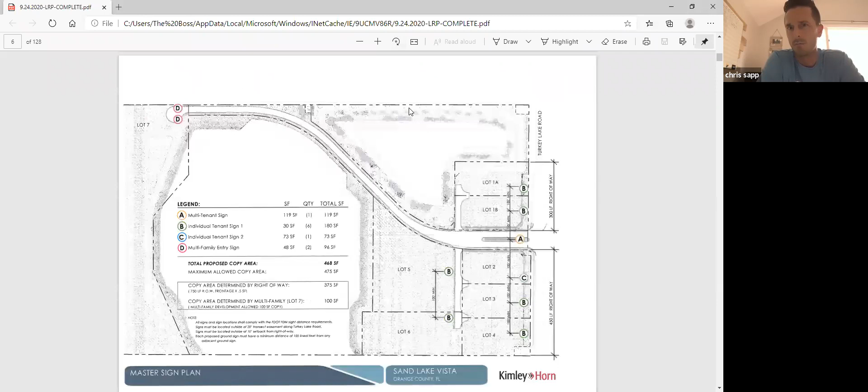Kimley-Horn also has a department that deals with signage, and they had presented a resume of sorts for LRP to take a look at. And I apologize, it was not part of the agenda. I noticed it today, we shot it out, so I don't know if everybody got a chance to take a look at it. But they have done stuff as local as Kissimmee, so they are familiar with municipalities, HOAs, businesses, etc.

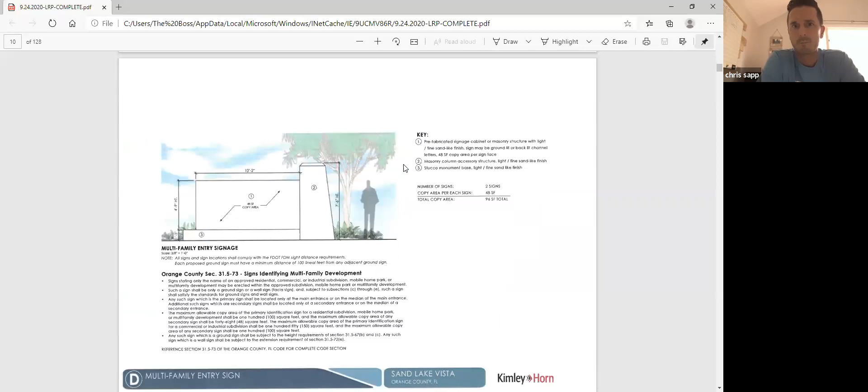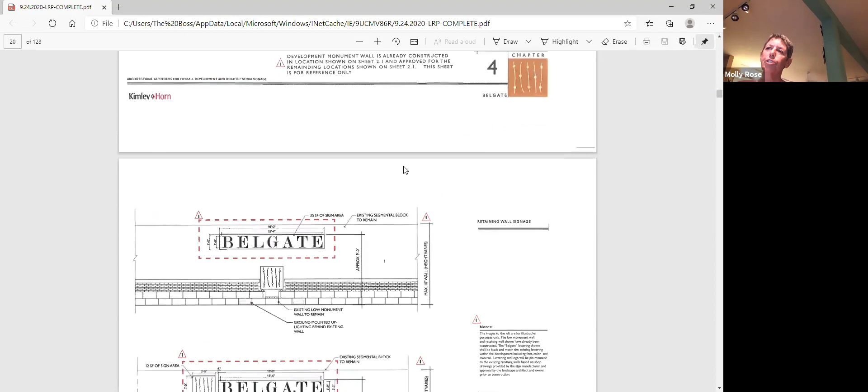Could I ask a question? I think Kimley-Horn's plenty qualified to do this and everything. I don't have a problem with them doing the design and putting out the bid packages and all that, but I don't like the idea of making it a turnkey with them, because they really don't have production capability. I mean, they can oversee it, but why pay an upcharge to have a middleman? You know what I'm saying?

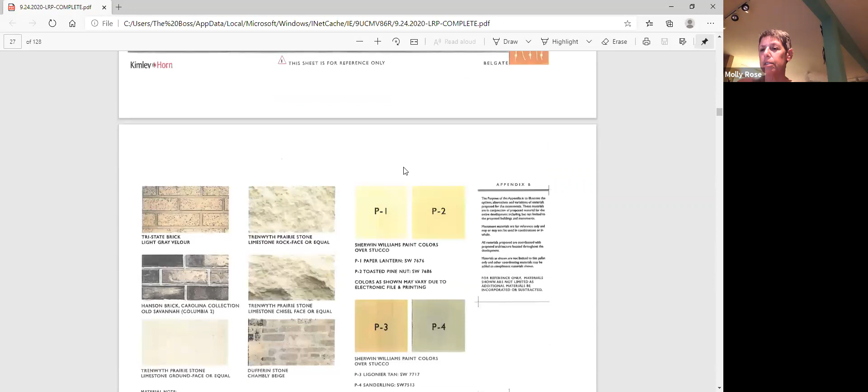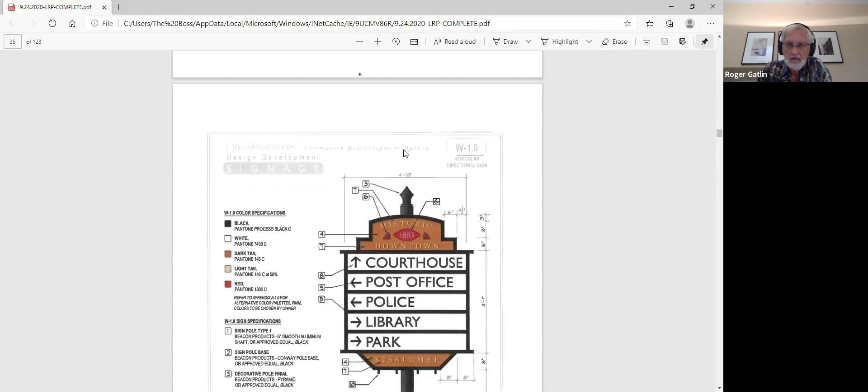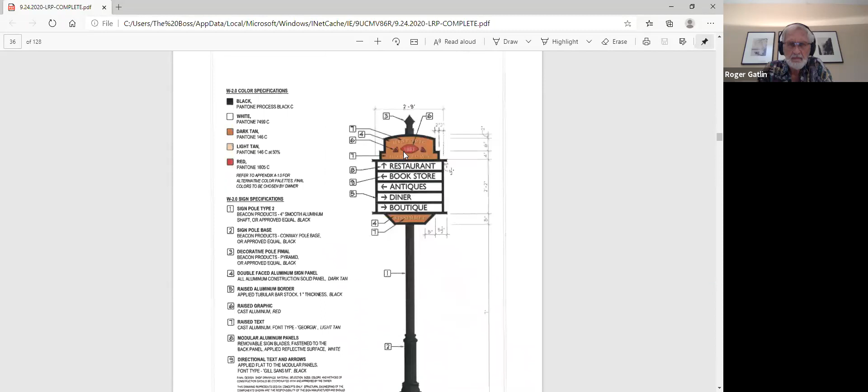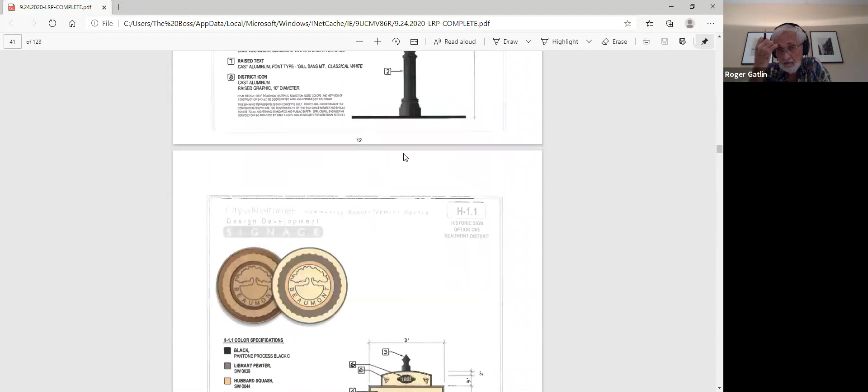What was the thought of the town council in that process? Wasn't theirs would be just a design, not a design and build or anything? Well, yeah, go ahead, Chris. Yeah, town council's not discussed this because we want to put it in front of LRP first, but basically what we're looking for from them would be individual IPOs for a specific project to come up with design. And, of course, we could put it out for a request for quotes for actual production of it.

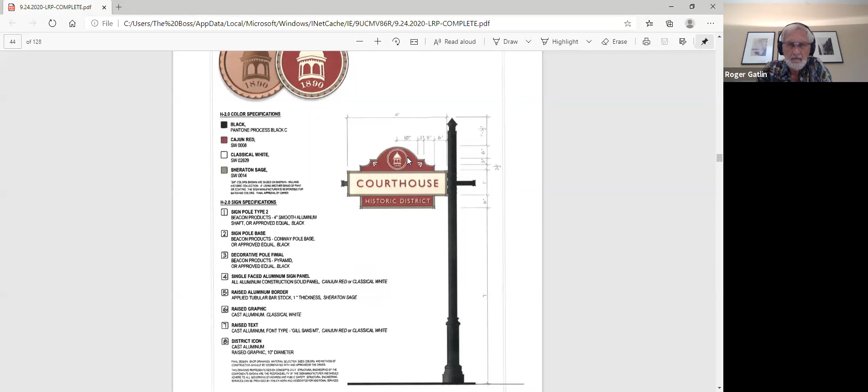Okay, because I don't mind recommending them to do the design portion of it, but I don't see giving them the turnkey of it.

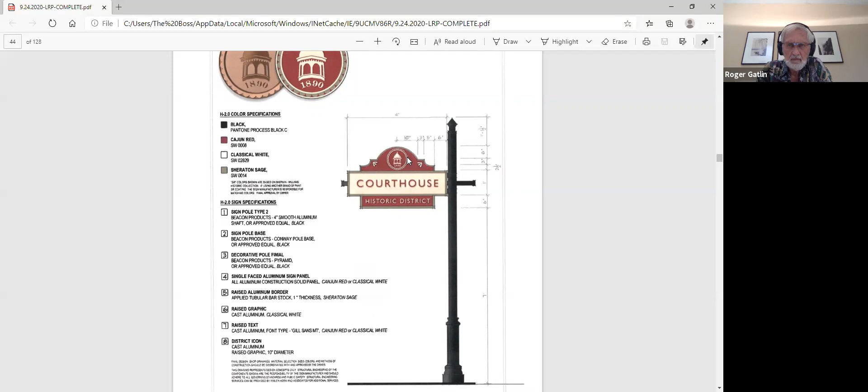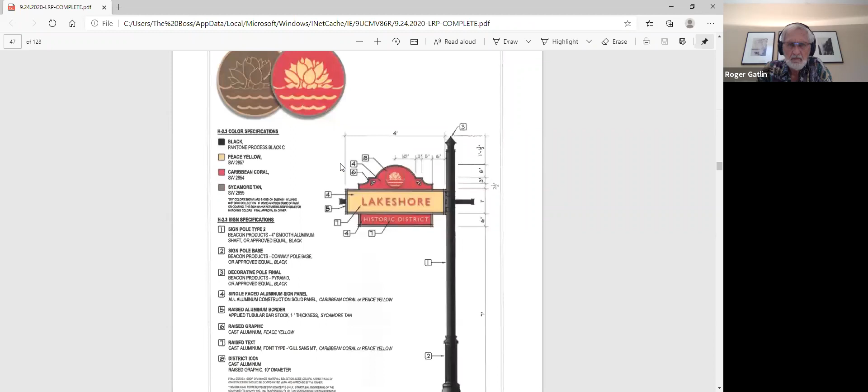No, Molly, I don't necessarily think confusion is a good word. Maybe it's just a slight change of direction. When we were originally talking months ago, we were looking at kind of a DBO type thing, design, build, operate, and I think that narrowed the field to what we had. Then as we started going through this, we felt like if you're looking for folks that could actually do the graphic fabrication work, they may not have as much of the design intent that we would want. So I think we backed off a little, realized we already had an in-house under contract

engineer, and that's one of the reasons why we picked Kimley-Horn back in the day, was because they had this wide berth of urban planners and graphic designers. So we thought maybe it would be best if we just allowed them to work the design. Chris, forgive me if I'm stepping on toes here, but the whole idea was maybe, since they understand our town, they're working with us on all our roadways and stormwater, they're actually doing the board trail, it became apparent that holistically for a design approach, they might be the best, and then we'll just go out and bid it for fabrication.

Yeah, I think it'd be very similar to the engineering projects, where they get it all the way through engineering, and then maybe part of their scope would help with finding that actual fabricator in the end, because we may need some assistance with that.

Yeah, and also they could give a cost estimate. With these specific sign deals, we may need to give them what we think is our budget for a sign, so they don't go too elaborate, since some of the ones they've done are pretty elaborate. I think we'd give them a design, which usually includes estimating and cost estimation.

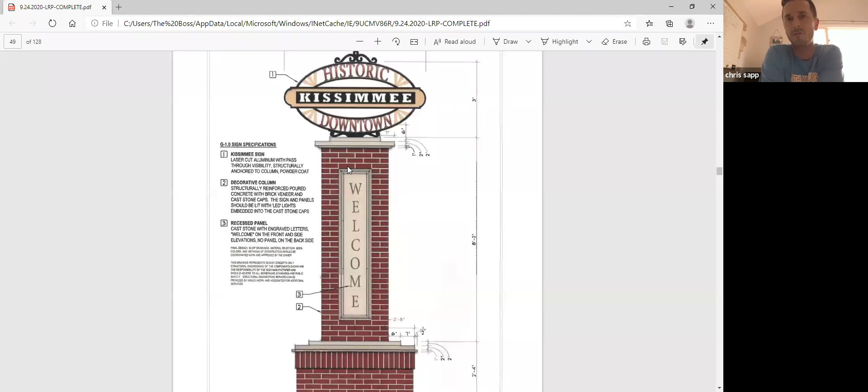Correct. And then from that point, as we do with roads, let's say a road project, then we would go out for bids for specific contractors to do the work.

Right, okay, yeah, I'm okay with all that, because we tried going the other way and did not pick the right signage company, so they did a bad design, and fabricated a bad sign. I think that was my fear, Molly, that if you don't have the right design team, you end up with what we ended up with.

Is that big red? Having worked with graphic installation and design firms for years, I think what you'll find is that most folks that fabricate signs are very rudimentary in their design and look. So it's probably a much better approach for us to do this so we don't end up with big red.

Okay. I think there's a manufacturing firm that does a lot of the village's stuff, typical signage like this. So I can reach out to them and see, once we have a design from KHA, we can reach out to a couple vendors that I know over there. There's a ton of vendors here that we use at Universal Studios.

Yeah, so we've got the talent. Great graphic design and signage companies that fabricate for Disney, Universal. So I think we'll find the right guys based on the type of sign we're doing and the design intent that we have.

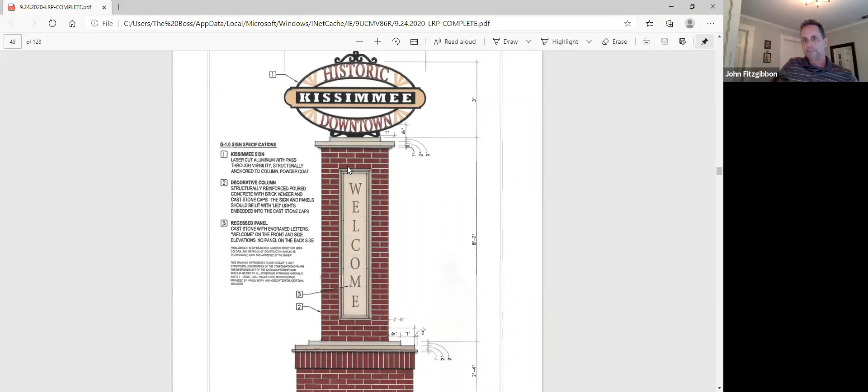Okay. I think Scott's not on because of the red sign.

I think Scott chose to miss this meeting and throw me into it because he knew the signage was going to be discussed. Yeah, he learned a really big lesson there.

I guess the motion for LRP would be to recommend hiring Kimley-Horn as a designer for signage, making clear that's the limit of it—a typical engineering or design contract, not a construction thing.

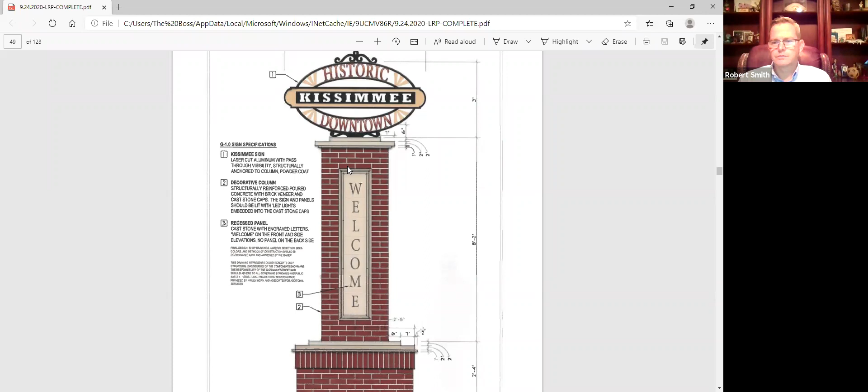My only question before we do a motion: do we want to specify any particular signs they'd start with, or leave it open? Council can designate which signs we want them to look at first, like entrance signs. I recommend leaving it open, since they'll have various signs to work on—entrance, wayfinding, and so on—each done as an IPO for whatever signage we'd like to see.

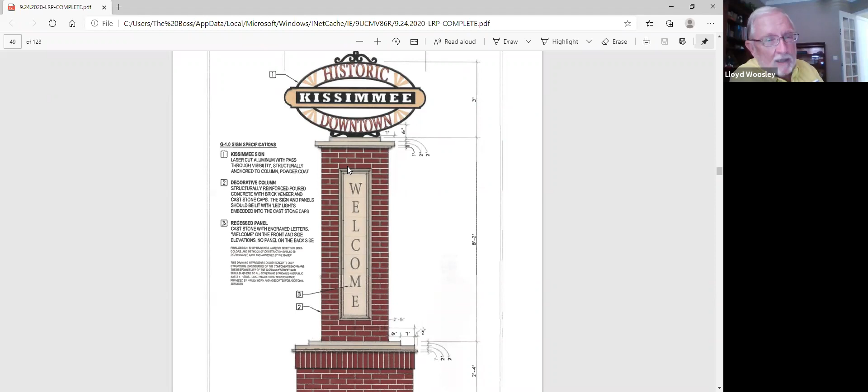But wouldn't it be safe to say we don't want a Kissimmee entrance arch? Yes, they can rule that out. I like the one at the Villages that goes over I-75. If you've seen that one, it's really nice. I think we can limit it to one side of the right of way. We're actually designing Klieg lights for the new facilities, so it'd be really cool—those lights, the three that kind of spin.

So I will make a motion that we recommend hiring Kimley-Horn to do design and supervision. I'll second that, but I'll amend it a little, since they're already hired. The motion should be that we agree to use our existing engineering services firm, and that any signage will be done through IPO, specifically for the tasks at hand.

I would just have staff draw up an amendment to the current master service agreement. I think that's already part of it, to be honest—I thought all we'd have to do is issue an IPO to them, since we had urban planning, it was general engineering services. I think we're okay with how the language is structured for their master services agreement, and the individual IPOs would define the scope specifically to that group of graphic designers for the firm.

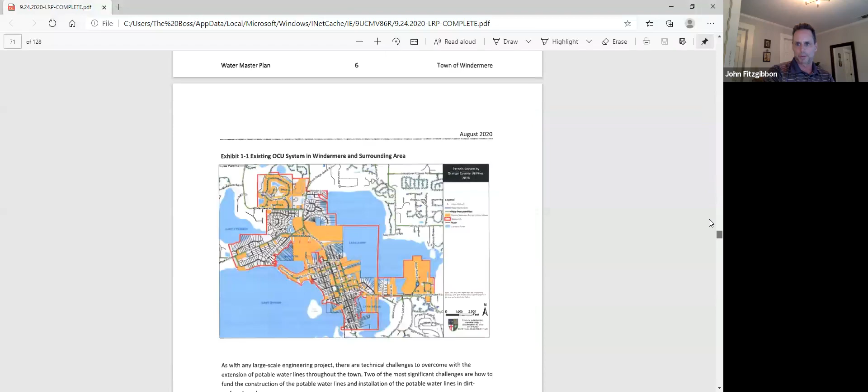Now, I was looking at the cost savings plan, the existing streets that have water - some of them didn't have new hydrants going in. I was looking at Pine Street because I live on Pine.

So you're saying that will be retrofitted with 500-foot spacing? A lot of the lines were not sized.

You need a minimum of a 6-inch line in order to have a fire hydrant. That's the minimum. So that's what we're looking at doing, and then making sure that the systems are looped so you don't have dead ends. Because once you have a dead end, then you have to flush those lines somehow.

One of the areas we're going to have to do a dead end is West Second Avenue, but we're trying to figure out ways that instead of wasting the water, can we hook it up to somebody's irrigation line.

But again, I didn't see in the plan any additional hydrants on Pine, as an example. Right, so if there's a need on Pine, then we can install them as long as there is a 6-inch line. The flow is going to be the same.

No, I was just reacting to your comment about 500-foot spacing, and I think it's much longer than that currently, so I was just curious. Yeah, some standards ask for about 1,500, but I think we wanted to do it about 500 feet.

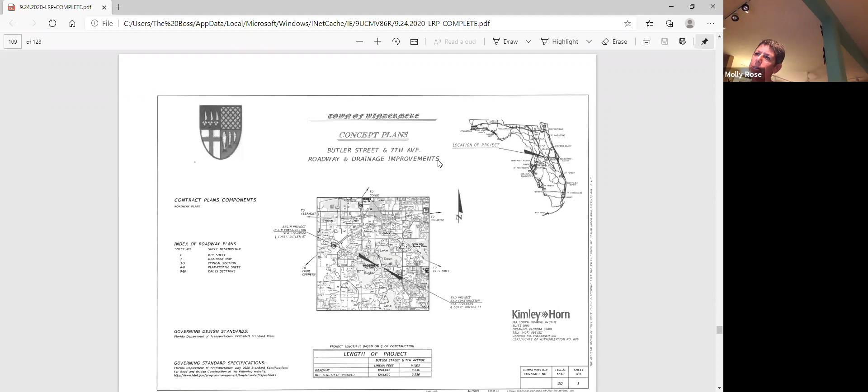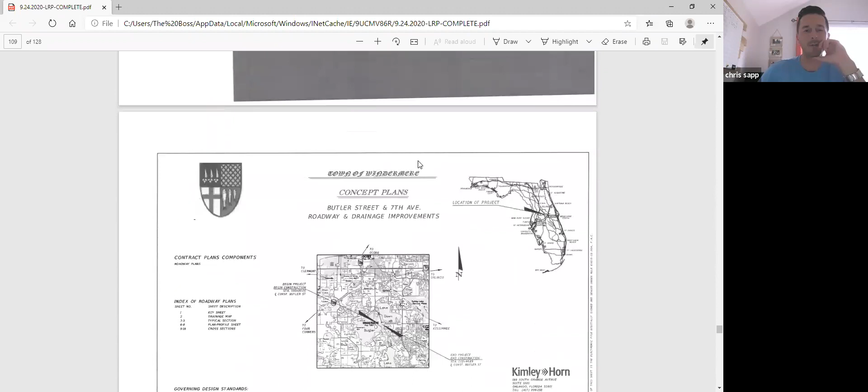It's like $10 million, right? I don't know if it's that much. That's what was in there. Was it 10 million? Yeah, I think the total was 10 million, the phases were pretty much close to the same amount of dollars. It was about 3.5 million per phase or something like that.

Even a loan with no interest is going to be a lot of money for 1,000 homes. Absolutely. And what they recommended was to do it in sections, not all at once. We agreed, but once we do one section, the other sections are going to cry foul, especially if they're paying for it and not getting it. That's not right.

That's why we're going to get the lobbyists. But right now, with the way the economy is, I don't think there's any money available for us this next fiscal year, but maybe in future fiscal years we'll be able to tie into something, or if another infrastructure program is put into place, we'll throw our hat in the ring. I think the good news is the foresight that Robert and council had.

I don't want to discount what the council has done. They put ourselves in a position to understand the infrastructure requirements by investing in a master plan, and to understand what the impacts are. So we've developed this plan that, as Lloyd said, allows us to be somewhat shovel ready, but also allows us to understand those impacts. It positions us better to have studied it appropriately and to have a solid plan moving forward. So I agree.

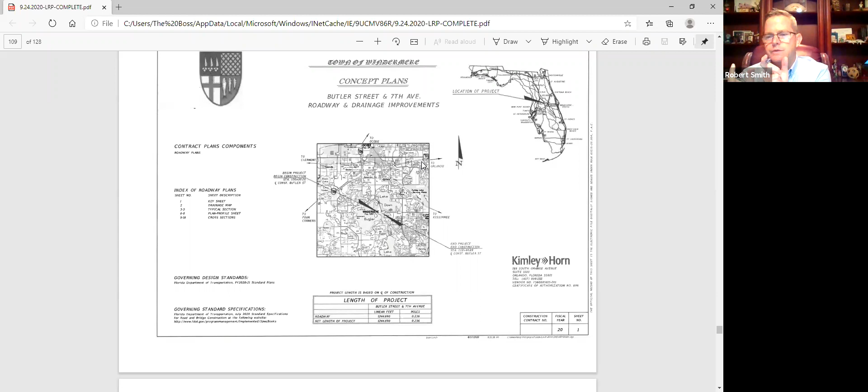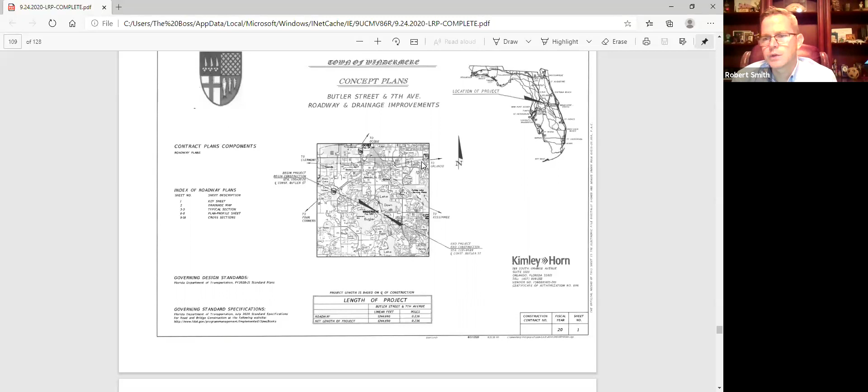Then you start the swale system, which is a grass swale with a 4-to-1 slope, about 14 feet wide. So that total is about 44 feet.

When people see that, they freak out again, believing their front yards are their front yards, when actually you go 25 feet in front of your house and that's where the right-of-way starts. So when I started marking some orange paint on people's yards, they were like, oh my gosh, I really didn't understand how close it was to my front yard.

The town council also wanted us to create a typical section that could be utilized all throughout town, so we would be consistent, because right now we're consistently inconsistent with the way we do roadways. You can see that driving up and down 3rd, 4th, any other roadway—there is no typical section, they all look completely different. This would create a typical section, and by doing that you can create an overall maintenance and repair plan. It doesn't matter who's public works director or how many employees transition throughout the years, that O&M will always be there for them to understand how to maintain the roadway, because everything is consistent.

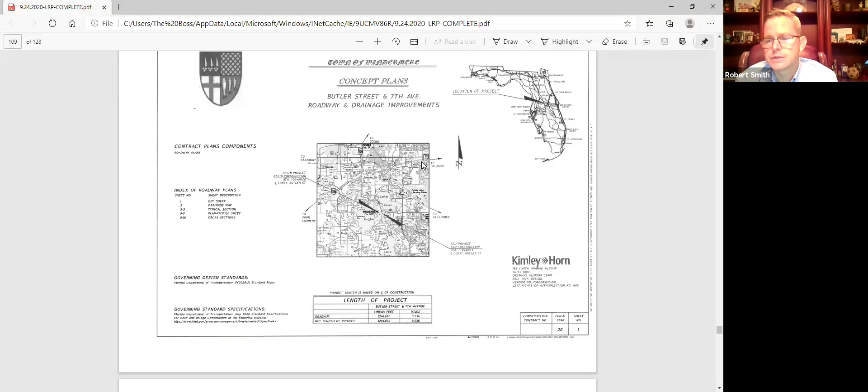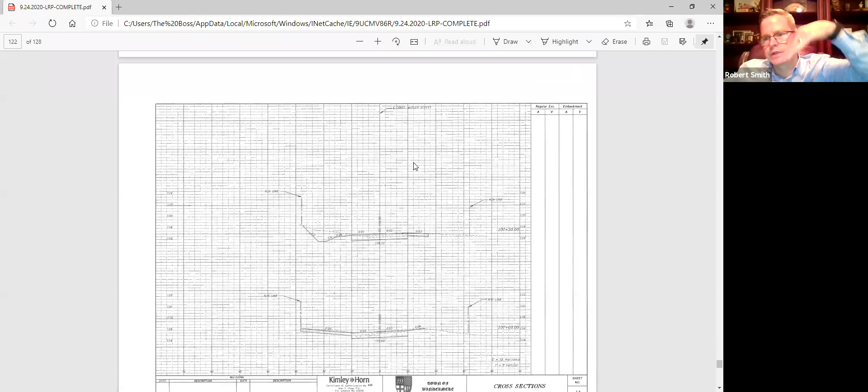So what I did was I went out there to demonstrate what we changed the typical section to be. Everybody knows 7th goes like this, Butler goes like this, the bottom of the bathtub is Fernwood Park. So we will be expanding the retention area over in Fernwood Park.

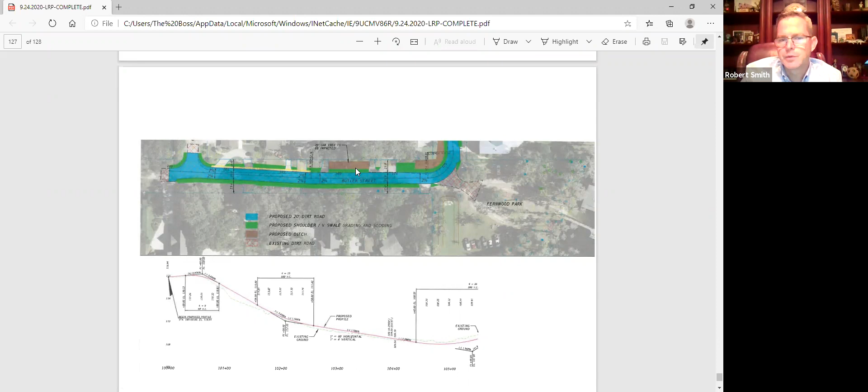Here was what was proposed at the very beginning, which freaked out a lot of people when you see browns and blues and all sorts of stuff. People thought, oh, it's a brown ditch, it's going to be like this mud-looking kind of ditch thing, and that's not the case. It's actually a nice looking swale, and they already have a swale system right over here with a culvert that goes into Fernwood Park.

So talking about Butler, I went out there today with Travis, and we had to keep a lot of the residents away because we just wanted to figure it out on our own before we had everybody coming up to us, getting in our ear, either saying what we're doing is bad and negative, or trying to influence us one way or the other.

If you look up here, this guy's house right here, when I marked that orange paint, we had Miss Willard with us, and she was surprised at how much right of way we actually have. If you look at a sight line all the way over here, that's pretty much where you see some of the utility poles. So what we did, in order to be fair for everybody, since we're doing 44 feet of project width, was give 8 feet on either side to be fair and equitable for both parties on Butler. Again, this is only on Butler because it's a different story on 7th.

So you have 8 feet and 8 feet that is added on to what their 28 feet is right now, and then you have the 44 feet total. So here would be the 14-foot swale and the 6 foot of utility line. When you do that measurement, it actually lines up with the start of Butler, the dirt road. And when you measure the 18 feet for the minimal standard for a dirt road, it actually leaves about 2 feet of dirt road to the south.

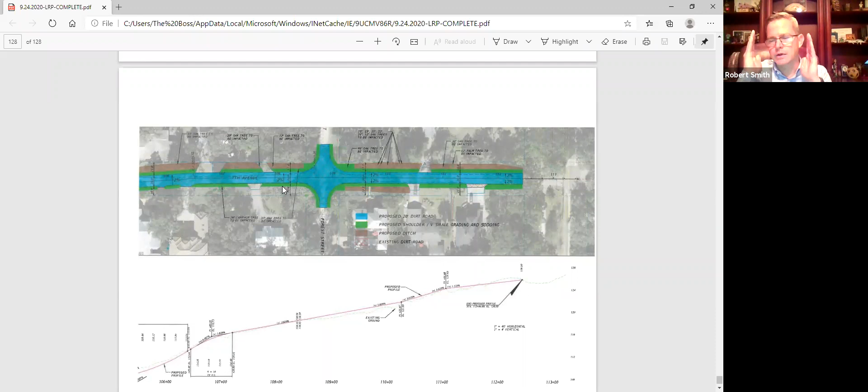But if you go out there and take a look, when you start that 14 feet with the 6-foot utility shoulder, the 16 or 18-foot road, and then the 3-foot shoulder - this is pretty much a brand new house, and straight down you'd only be losing 1 camphor tree and a dead oak that's out there. So 2 trees would go.

That's it. And then when we go further over, there's a huge oak down here a little bit that we're going to want to make sure we protect.

And when I went out there and met with the Stroops, both Don and Tom, and then I met with Donna Steele and Carol Willard, what we'd have to do in this area here is we would have to go ahead and start moving the roadway to the north. By moving the roadway a little bit to the north, again, that seems like a little bit of traffic calming when you have a bit of a curve because it's not a straight shot.

And then the Stroops understand that they're going to be losing some of this area over here once you start meandering it over. Once you hit this point right here and take a look straight to Fernwood Park, it's already a swale system, so you're pretty much not impeding anything from that point on. So the only creative engineering that's going to have to happen is up here, and when you get to here, I believe we're able to go ahead and accomplish everything.

So meeting with Tom and the Willards, both of them agreed that it makes sense. Their fears of what they see from an aerial, as opposed to when they see it laid out on the ground and can actually view it, changes their whole viewpoint. So they stated to me that yes, that makes sense, and they would not be in opposition to it.

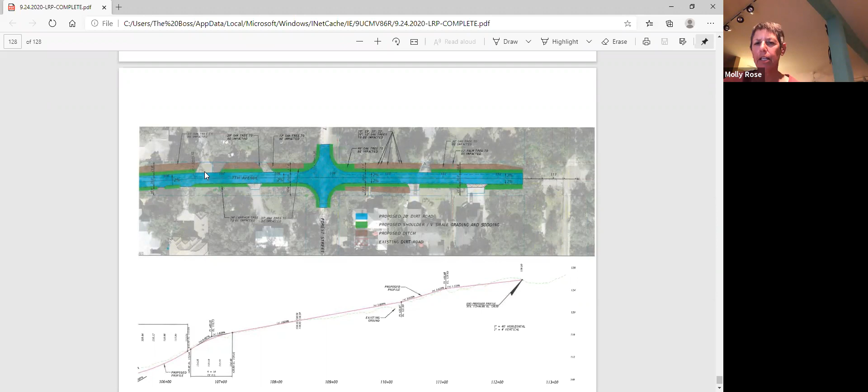The other question I have is on Butler. There's a huge drop off in elevation from 6th Street to 7th. Is that right? Yeah, 6th to 7th Street there, the water just comes rushing down. Does this address any of that issue?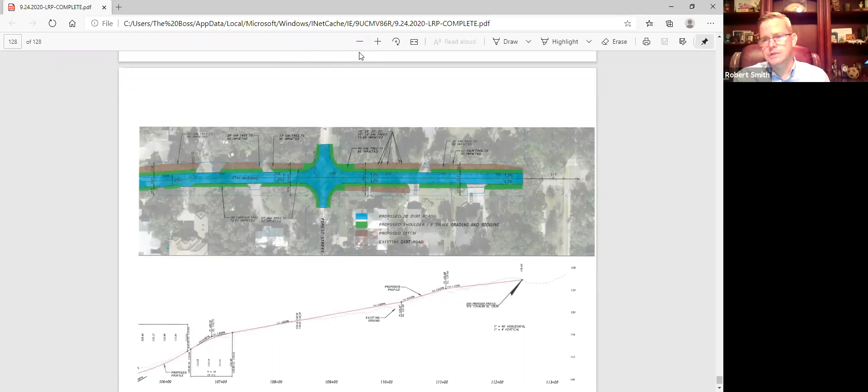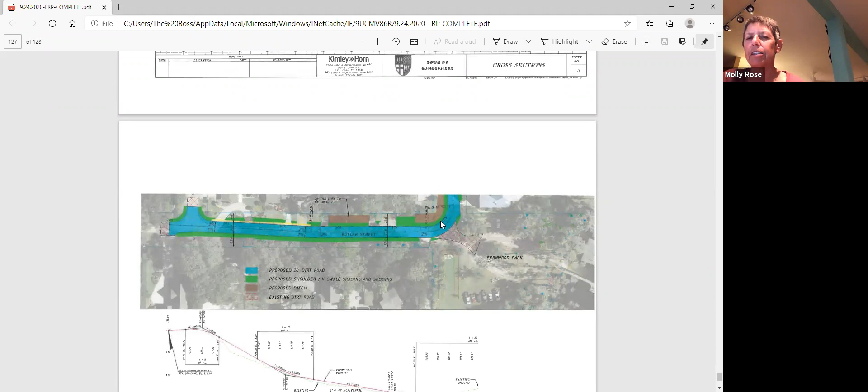Yeah, this would take care of it, because right up here is 6th, that's where we start. Go to your last one, you're on 7th. So go to 6th Street, which is right here. So from 6th to 7th, we're talking like maybe 10 or 15 feet. The road goes down in elevation, you can see it right here.

So what happens? Does the road still take that same path and you just try to pick it up on the sides for the water, or what? Yeah, you'd have a 14-foot swale. You'd pitch it to the south or pitch it to the north to get into the swale system, and then once it hits here, you go into a piping system to go to the retention area.

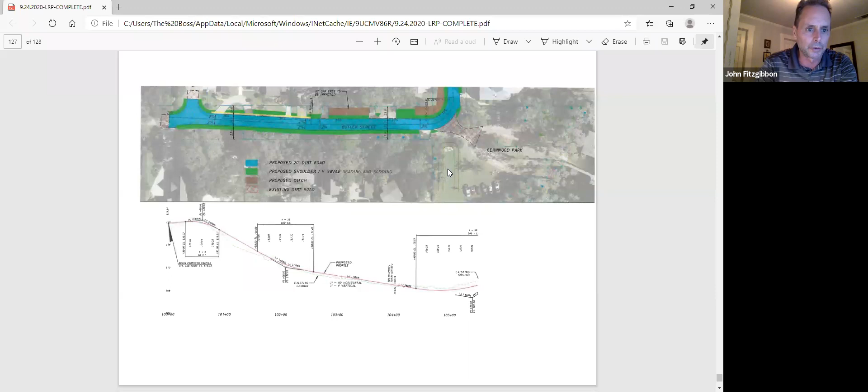But the other thing too, if you look at that profile, the center line of 6th Road, there's like a little triangle. What they're actually doing, if you look at 6th Avenue center line, is peaking the road up a little bit. You'll see where the existing road is and the profile below the highlighted version. So they're peaking that a little bit so that the water actually isn't coming off of 6th, it's going to come back down into the storm structure that we currently have.

So they're gonna create a swale on both sides of the road? Yeah, so what they'll do is they'll peak the intersection of 6th and Forest so that a lot of the water coming down 6th will actually go back to the existing storm structure we have.

In addition to that, the other thing that's being worked on with a lot of the residents -- there's a resident right there on the corner of 6th and Butler that has a tremendous amount of water coming off of their home -- is working with Wade Trim to be able to get these residents to start controlling more of their stormwater so it doesn't all pour into the right of way.

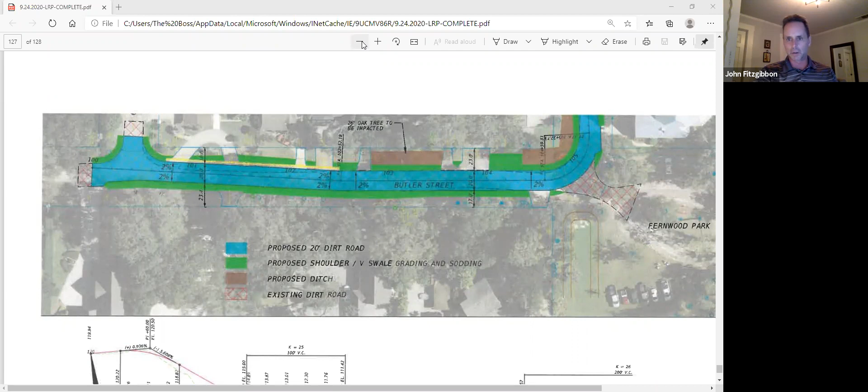So the house on the corner, if you look at that little circular drive on the corner of 6th and Butler, that's a huge runoff component right now. And there are actually stormwater inlets right there that we just need to get them to tie into, along with the way they're dealing with and treating their existing stormwater on that circular drive.

And then when you go one house further, which is the little one-story house, same thing happening. So you've got a lot of these houses right off the corner of 6th, coming down Butler on the east side, that are big contributing factors to that.

And again, you have a lot of vegetation here, and that's why we're looking at doing the swale systems to the north or to the east. We do have an area where we can maybe fluctuate 2 to 3 feet while still maintaining that 3-foot shoulder. Because right now the Clonts and a lot of these people over here are experiencing flooding, and then the Willards are experiencing flooding too. So everything's coming down here and flowing into these properties and not making it into the retention area.

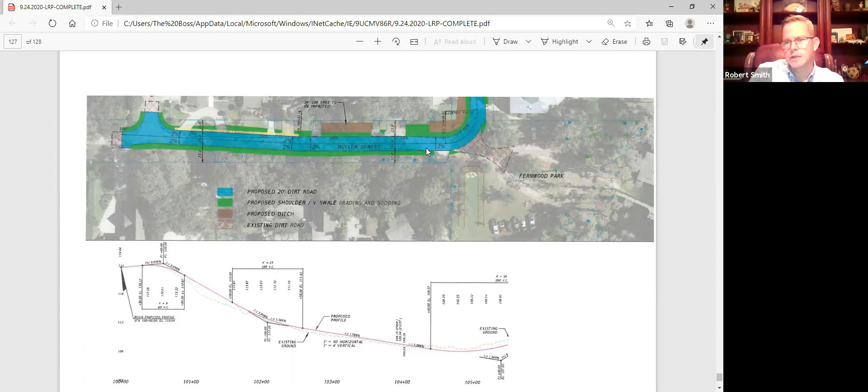When you come down here, it's coming down through Fernwood and down the dock. That's the issue with all the west side properties, Molly — they're lower than the road. So what you have to do is super elevate the road back away from them, and that's why you see the brown. So what we're trying to do is pitch the road back, almost like a catcher's mitt, to push it back to the east. At this point, it's worked in front of our house — same philosophy the town uses — grading it that way has really worked well. You've got to pitch it away from the lower homes.

I can describe it a million times to people, but until they actually see it, feel it, touch it, then they understand. I think that's what happened today with Tom, the Willards. They still need to understand that the town — Windermere — people perceive us as being really, really wealthy when it comes to tax base, but we're not. So in order to afford these things, we either have to increase assessments or taxes, but that's why we seek out grants, and I don't think we want to miss out on grant opportunities over 2 feet.

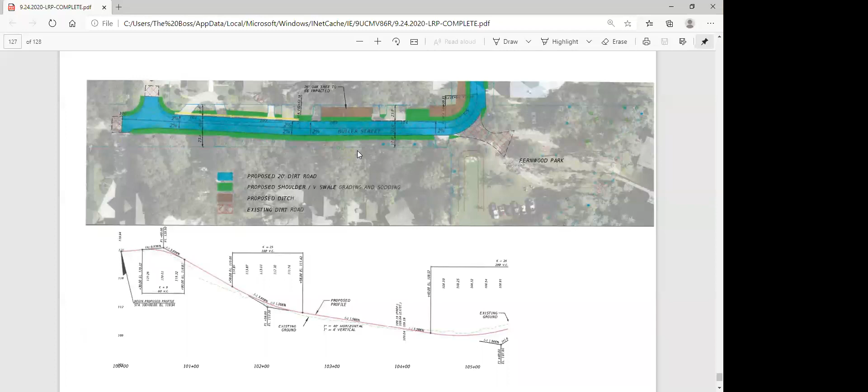Is John still there? Roger, are you still there? Yeah, I'm here. I cut my video because I thought it might get better reception. As long as you're not on the toilet, sir. But yeah, that's fine, I can second the motion, I guess.

I really like walking the dirt road, so keep as many trees as you can. That was our intent, and the only two trees that would have to come out on 7th Avenue would be a camphor, which is invasive anyway, and there's no way around it. And then there's a huge dead oak that's over there anyway.

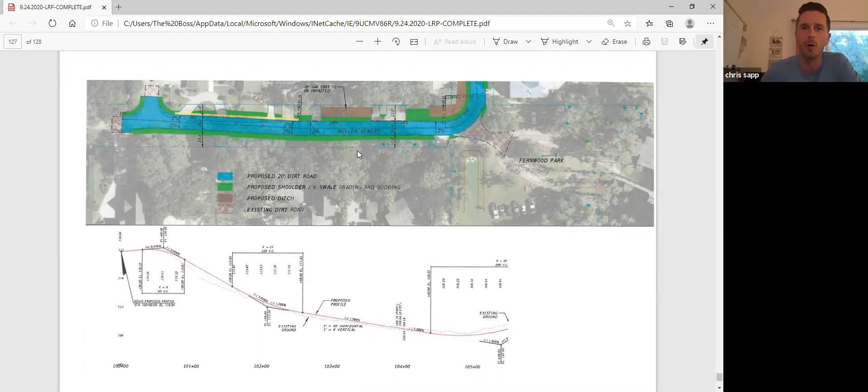So there's a motion and a second, so we need a vote. Is John going to vote? Apparently not. Do we need him? You've got a quorum without him, and he can stay for the record after as well.

So there's a motion and a second. All those in favor signify by saying aye. Aye. All opposed? All right, motion passes. You can confirm with John later that he didn't oppose.

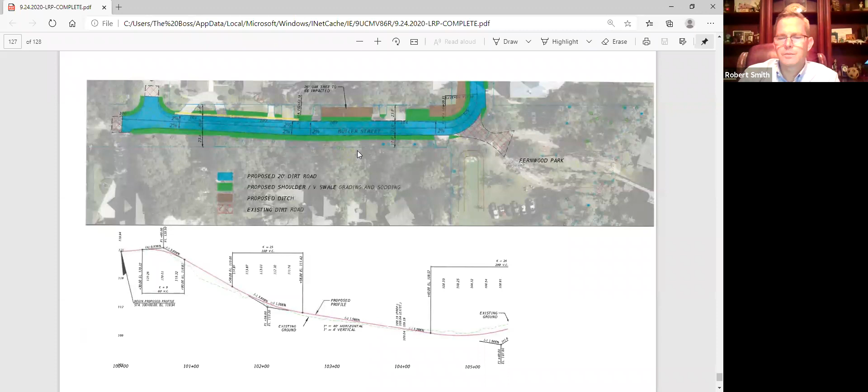Robert, have you gotten anything definitive from FEMA regarding the 16 and 18 foot differences in the road width? Right now, the contracts say that we have to meet the minimum standards. We're trying to figure out if there is a coming guidebook close to completion. We're looking at different guidebooks.

There's like an AASHTO book that is somewhat different from the Florida Green Book. And then we would ask them again, as far as minimal standards, if there are environmental impacts, if there are trees, as long as we maintain at least some sort of minimum standards, would that be okay? Or can we ask for...

Oh, Robert, you froze. Come back.

While we're waiting, I think this is prime for the development of a BMP manual for sand roads. And that could become a standard, even if it's a Windermere standard. And all we probably have to do is get Orange County to approve it.

Well, yeah, I hear what you're saying. And if he can get less wide roads, narrower roads, it does keep the traffic speed down and the amount of traffic down. Yeah, that's my biggest concern, but we obviously don't want to lose funding because this is hundreds of thousands of dollars.